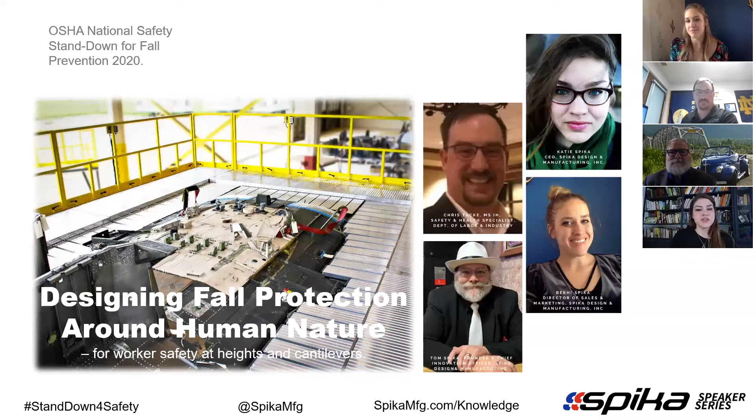But to get started, Chris, could you tell us a little about the status of the industry, some of the current challenges in fall protection and fall prevention in construction?

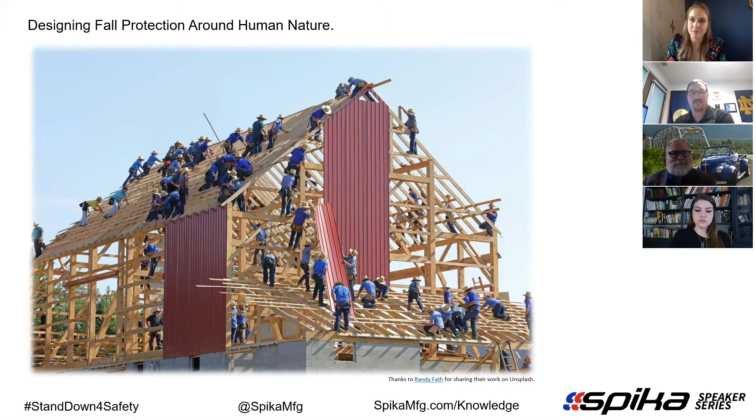If we look at the reason why we're all here today, OSHA has created these stand-down events, both in general industry and construction, to highlight certain hazards they're seeing. One of those is fall hazards in construction. Fatalities caused by falls from elevation continue to be a leading cause of death for construction workers. Fatalities from falls from elevation accounted for 338 of the 1,008 fatalities alone in 2018.

So they created these events to promote awareness of fall hazards in construction, and that continues on today. In 2019 and even into 2020, we see that fall hazards and citations relating to falls continue to be on the rise and leading towards the top.

OSHA puts out a top 10 list of violations for both general industry and construction. Of those top 10, 6 are related to fall hazards and falls in construction, with fall protection being the top violation. Scaffolding comes in at number 2, ladders at number 3, and fall protection training at number 4. So even within the top 10, the top 4 are related to fall hazards in construction. Rounding out the bottom is number 9, aerial lifts, and number 10, fall protection system criteria.

If we look at the standards OSHA is citing, 29 CFR 1926.501(b)(13) is the top cited standard. That has to do with residential construction, 6 feet or more above a lower surface — the standard says fall protection shall be in place. So that's what we're seeing out in the industry.

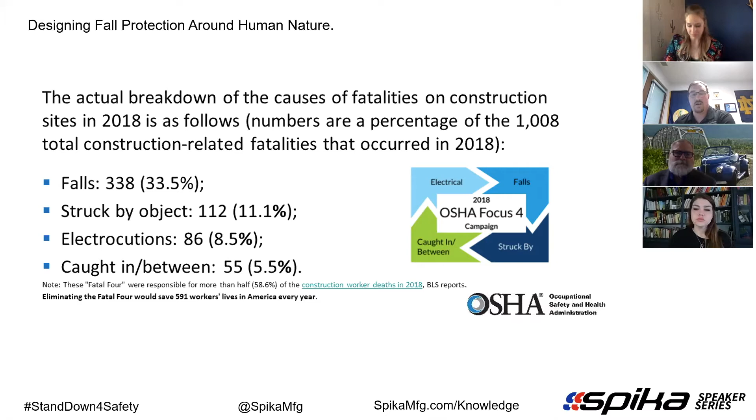And if we want to tie that into human nature, this is where I come in and the consultation project comes in. When we consult for companies, we ask them: can you tell us a little bit about your injuries and illnesses?

And a lot of times what we're seeing with fall protection is we have the equipment, but it takes too long to put on, or it's too cumbersome. It was a quick job, we were going to run up on top of the roof, so we didn't think we'd need it. And then we ended up having a fall from elevation. So that's kind of where we're at today.

Great, thank you Chris. Becky, could you chime in a little bit with some of the experiences you've encountered with our customers, some of their challenges in designing fall protection around human nature? Yeah, well what Chris said, basically if it takes too long to assemble or use, or it's too cumbersome, people just won't. So we all know human nature is kind of the path of least resistance.

What can I do that doesn't take a long time? It needs to be quick, it needs to be intuitive, which I think is a lot of what Tom is going to talk about in terms of intuitive designs. But yeah, the most common thing I hear from our customers, or people calling in that maybe are looking for a better solution to what they have, they say if it's not easy to use, they're not going to use it.

So I think Tom, you probably have some thoughts on specifically when we're doing some design work, how we can work with this natural tendency as humans to kind of take the easy road, and have ways to make the ability to have safe access at heights just be a really intuitive thing.

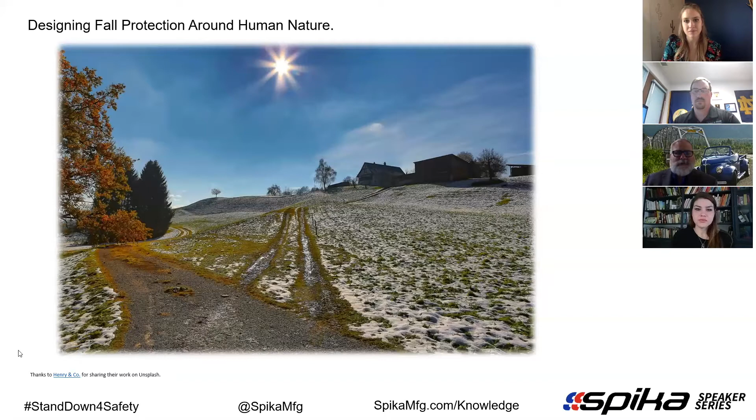They're going to see what they see to be an easier, faster, less obtrusive way, and they go that way. So that's one of the main things we have to really focus on as a designer. If we can go to the next slide there, we show one of our systems that's kind of exemplifying a number of these different things.

Now this again is showing the top of a helicopter, but it could be the top of anything you're working on. But all of this stuff, you could take a ladder, put it up to it, reach it from the side, get up on top, and just kind of make sure that you're staying in the middle. That's what a lot of people would do if they had their choice. But something like this is a fully enclosed wraparound system, and it's kind of the far end of the spectrum.

But these still move up into position so quickly and easily. It takes virtually nothing to push them up there. Once they're in place and latched into place, you have that safe working environment. You can do anything you want, and there's not that opportunity for them to not be paying attention, focused on something, and back off of the edge of their platform or trip on something and not have something to catch them with.

So what we're seeing here on the sides are what we call sliders, and they aren't on all systems, but they're on a lot of them. If you're trying to conform to an unusual shape, or you have something that's contoured, like these little obstacles sticking out here, these are common in our industry. This type of system allows you to very easily adjust from the top side to close off those gaps.

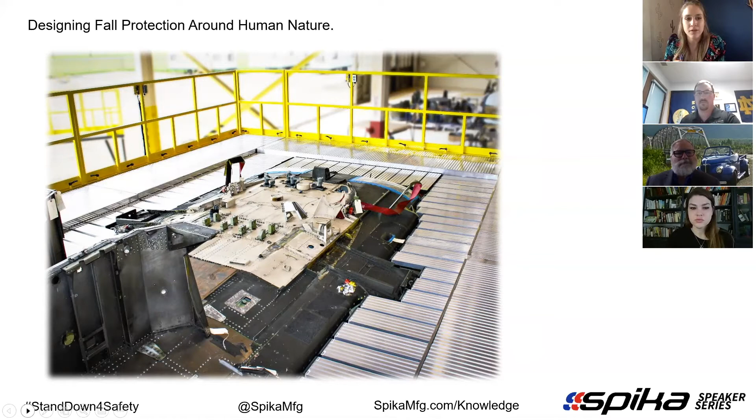It's, I think, sort of a side issue that comes with fall hazards - also some type of muscle strain, because if you have a system that isn't really working for you, you might either not use it, or not use it in the right positions. So mobility is an easy thing to consider when you're looking at having something that's easy to deploy. It has to be easy to push around.

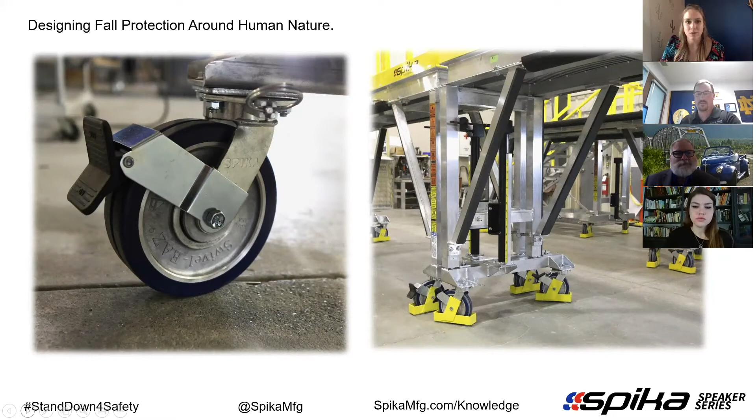The next slide will show a little bit about our guardrails. On the left side, there's basically a cam-lock attachment. When I think about deployability, I think about ease of use as well, intuitive design. So this guardrail can actually attach tool-free, but beyond that, it can also store on the railing.

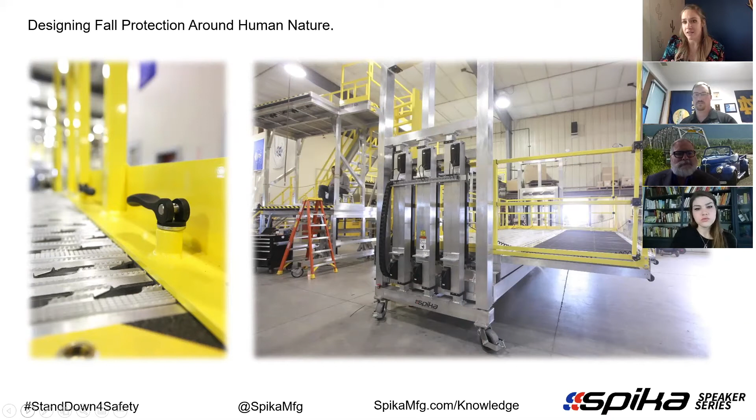So I think it's things like that in terms of deployability. It goes beyond just pushing it around. It's about ease of reconfigurability, and not having to say, now I have this guardrail, where do I put it? Or I turned this knob, now where do I put it? It's more about taking it to that final step, and thinking about making it more convenient for the person to do it correctly. Something as simple as that.

When you look at what it would take to say, geez, I really need to have this railing over here - I'm working this area that used to be blocked off and now it isn't, and I need to put a railing there - if you have to get bolts and bolt the thing down, or try to go back down, find the right rail, come up, try and work it into stake pockets or whatever, it's easy to say, I'm just not going to take time to do that. It's not worthwhile. If you have something designed that is so simple and easy to simply cam that up, remove it, set it over in place, and back down again, it's a matter of seconds.

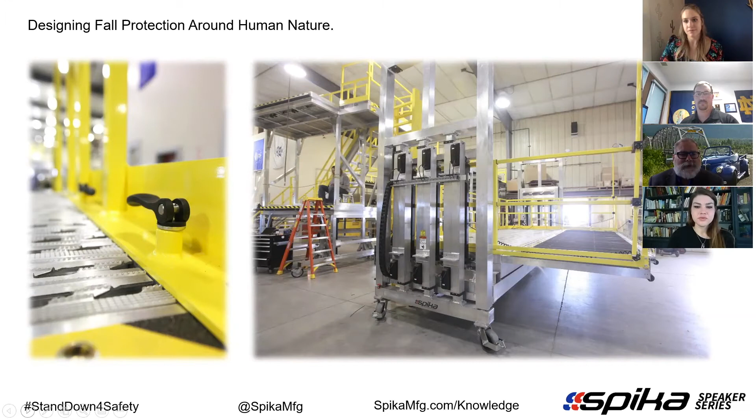So our focus is just trying to design things that are so easy and intuitive. I guess there's always going to be the human element that people have to take a certain responsibility, and you have to train them on how to do it. But if it's very intuitive, and on something like this here, where those side rails extend out...

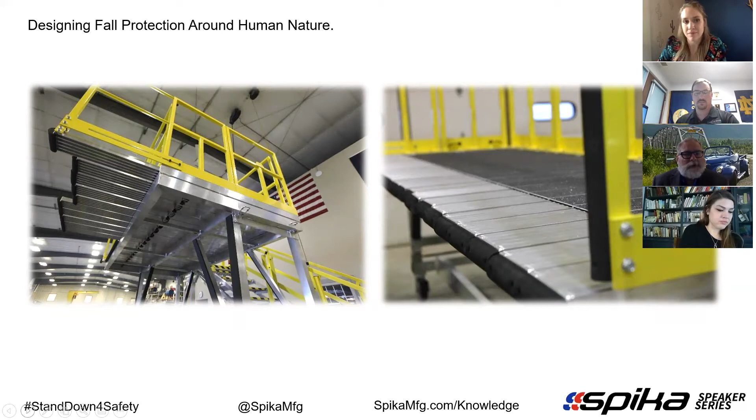...along with the slider that's coming out there, no matter where it's extended to, it's going to pull that automatically out and provide that safe working zone. And another thing, like these latches it's showing here on the left - these are another really slick system.

Instead of the old style that was done for years and years, where you'd move like a stair up to a platform to be able to access it, you'd move it up in place, and then you would have to climb up, sometimes on a ladder. Sometimes you would go up the stair itself and try and reach over and put pins in to attach them together. Too often they're not going to try and do that. They're just going to push it up and not attach it, just leave it kind of sitting there. Or they're going to be dragging a ladder up, trying to get up there to attach and pin them together. That's counterproductive to have that.

Something like this here, where you can actually just take one module and click it into the other one, and it's attached. You don't have to be up high. You don't have to have other hardware. You want to detach it, you pull on a little string, and it comes off. There's ways to design things to where you're ensuring that the user is not going to see any reason to not do it.

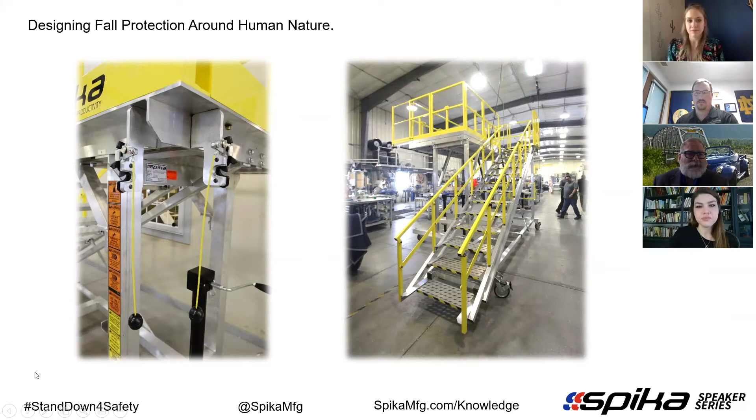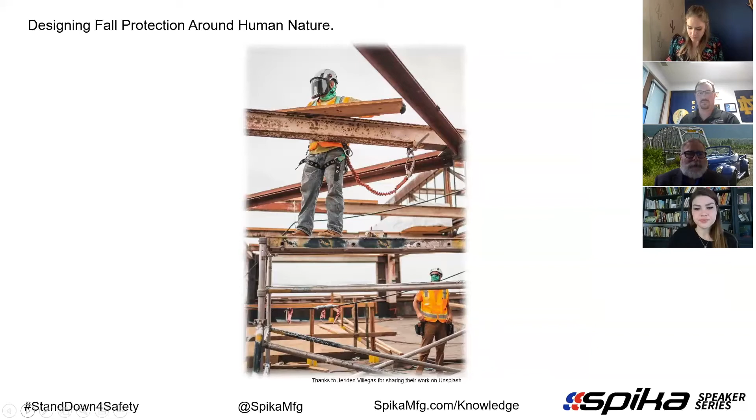So if you want to advance to the next one - this kind of, again, shows in construction there are just so many ways. Yes, it gets more difficult because you have multiple scenarios that all have a little bit different requirements, but there can be more universal stands designed that, especially if you're working inside, you can get them small enough to move into different rooms, navigate through tight spaces, and still have either manual or electric adjustability, so you can actually be working on a tall wall or on a ceiling and be able to access that.

So much easier than you could with trying to set up a scaffold, which takes time. And I'm not a big fan of just the difficult nature of using the things. To be able to push a platform in that's going to access all those areas is just really a far easier way for the users.

To be able to easily push platforms up to the sides, you have that automatic fall catch right there. Even if you step off of the top of whatever you're working on, you have the extended out range, and you have that safety railing all around. You also have a very easy way to get up top and back down again. If you're carrying parts and tools back up hour by hour, you get tired by the end of the day if you don't have a simple, easy way like a stair to get up onto it.

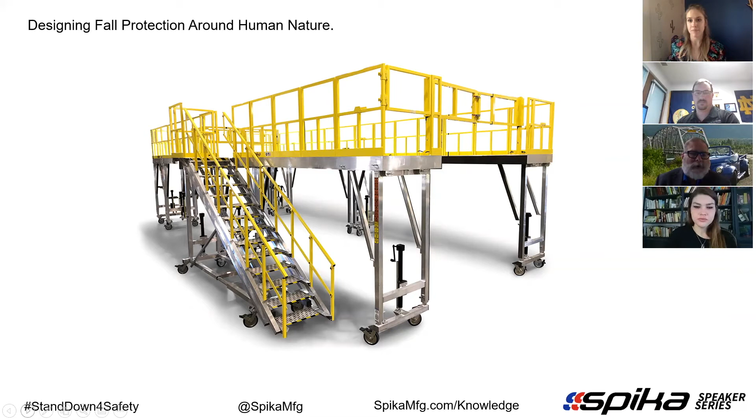So these are very universal. We do these for so many different applications, and they're very basic platforms. They're quite cost effective. Again, you can do them either fixed height, or you can have height adjustability. Manually, you can have it where you push a button and they'll go up through different height ranges. So you can actually start low and work your way up a wall or up the side of whatever you're building or working on.

It has a lot of the advantages of a scissor lift, but then advantages that scissors don't have. They're much more maneuverable, especially in tight spots or inside. You can actually work underneath them while you're working up above as well. They've got toe boards all around them, which gives it a safe work environment. Nobody's going to kick a drill off of the top or anything.

It comes down to just understanding what the need is and then truly designing something that's going to do that well. Chris, would you like to address that same concept of making sure the fall protection is easy to use correctly?

Yeah, so if we look at some of the citations OSHA gives, some are related to the fall protection system being used correctly. If we look at a safety fall protection system in terms of a lanyard and a harness, most of the time people are using the lanyards incorrectly. They're either not correctly tying off to an anchor point, or they're using the lanyard itself as an anchor point, wrapping it around a beam or a guardrail.

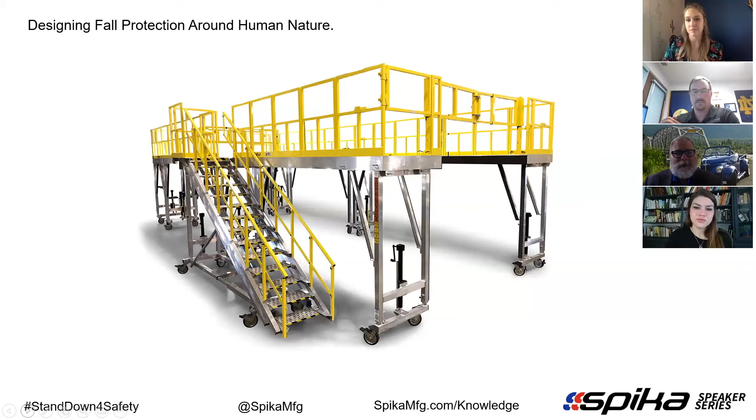But what we have seen so often is when these other solutions are being employed that really are not the best way to go, it's costing employees and employers time and money, and providing an environment that's not necessarily as safe as they think it is. So a lot of this presentation is just saying, just because this is the way you are doing it, you need to look at it and say, is this really getting us what we want? Are there better options out there?

Hopefully that encourages people to take a second look and see how well they are providing that safe environment. That ties into the third thing we've learned, which is that the fall protection needs to be the right equipment for the job. There's many different types of fall protection and fall arrest equipment.

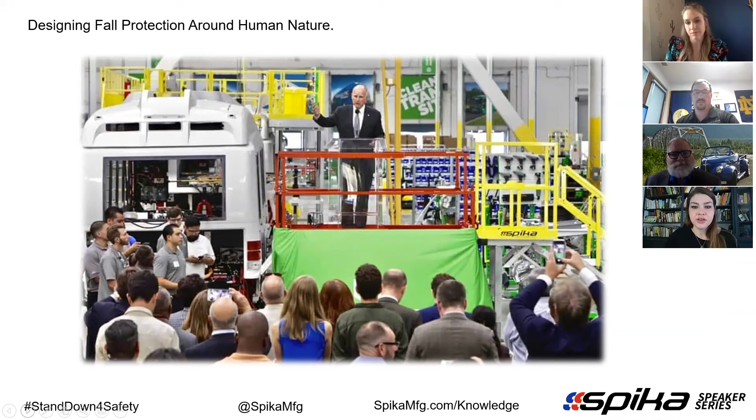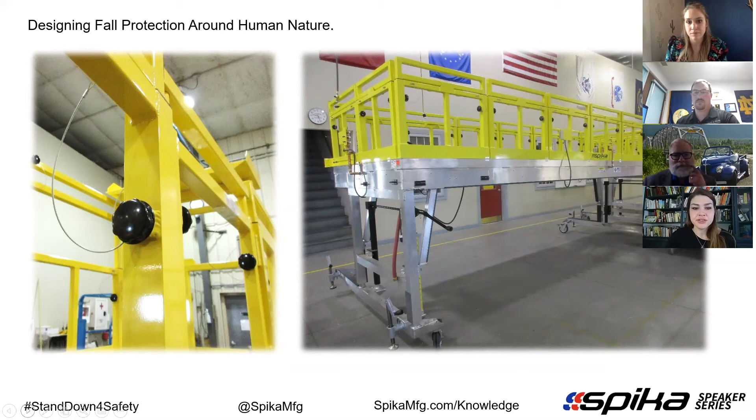There's a lot of different ways to achieve upper level access, but you've got to make sure you're providing your team the right equipment for the job so it'll be used most safely and effectively. Our next slide is going to show some examples of alternatives to ladders, because sometimes a ladder just isn't the right equipment for the job.

The ladder is obviously the first thing people think of when you're talking about getting up to something you can't reach from the floor. You grab a ladder. And yeah, there are times that makes the most sense.

But we'll all agree, if we've ever been on a ladder, you tend to reach as far as you can before you get back down and move it again. Anytime you're out of position, stretching off of that, you're getting the center of gravity off of what the ladder is designed to have. You're stretching yourself and can definitely injure yourself just from being out of position, trying to reach too far.

And that's the way so many people do it. It's natural human tendency. Yeah, you could do where you should, get down, move your ladder, get back up again.

But take something like this stand that we're showing here. If you have areas where you're constantly needing to lean over, reach over something, working on it from up above, or reaching over—like we had some applications in server farms where you had to reach clear over the top of this whole bank of servers, thousands of them, and access things back behind them. You could try and put a ladder in there, but as you're trying to lean over on that ladder, you're getting into a really unsafe condition.

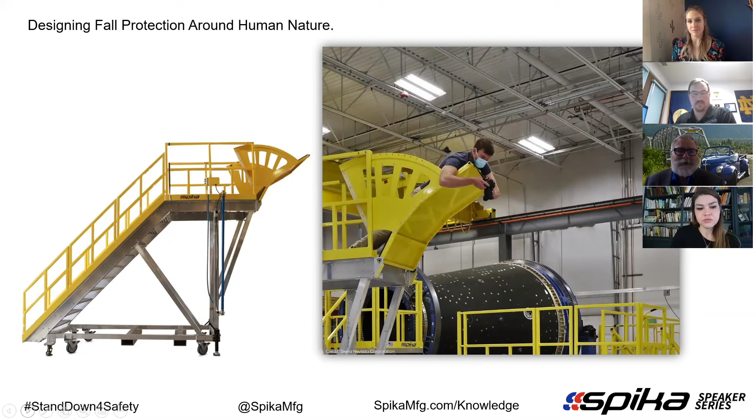Chris, what's your take on this?

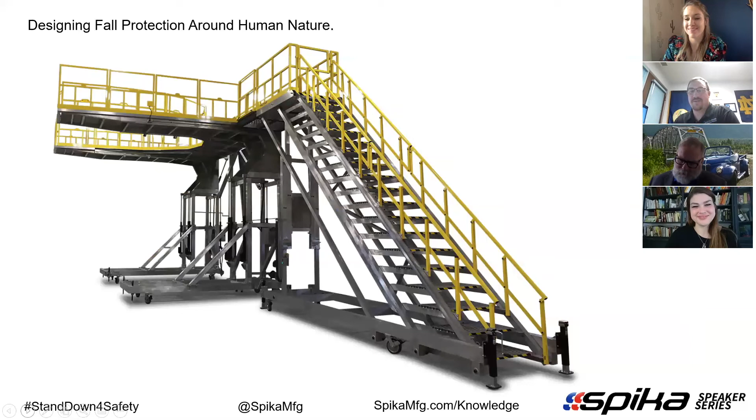Yeah, well, ladders are kind of the bane of safety people, because most of the time they're not being used properly. We're seeing step ladders used as extension ladders, or extension ladders cut into pieces and used as step ladders. So if there's a way to find a system that works better for you and achieves your goals within that job, we'd rather see that, and it can be designed safely.

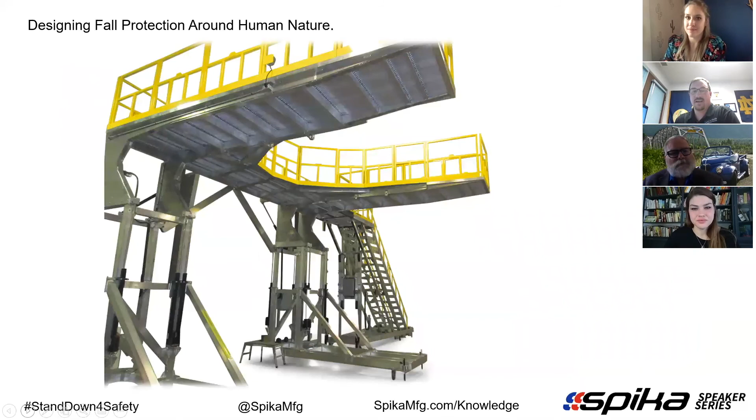Within the industry, both construction and general industry, it's going back to: are you using the right tool for the right job? More often than not the answer is no, because I have this ladder here, or I have this system here. Is it the right tool? No, but I'm going to use it anyway because it's quick or it's right here. I don't have time to go grab something else, so I'm just going to use this and make it work to the best of its ability. And that's not always the best thing to do.

And Chris, I think really what you're talking about there is the true development of a safety culture. Yeah.

Because a lot of times we as employees feel that management doesn't want us taking that extra time to do it. You're focused on being quick and efficient, but as employers and supervisors, you need to work on developing that culture that says your safety is the number one priority here. We can do this job efficiently, but we're going to do it safely as well.

You have to reach out to the people on the floor, the people out there in the field doing it, and ask: are there things you just really don't feel safe doing the way we're doing it? Are there times you've had close calls and realized it could have gone worse, that you could have taken a tumble that would have been really bad?

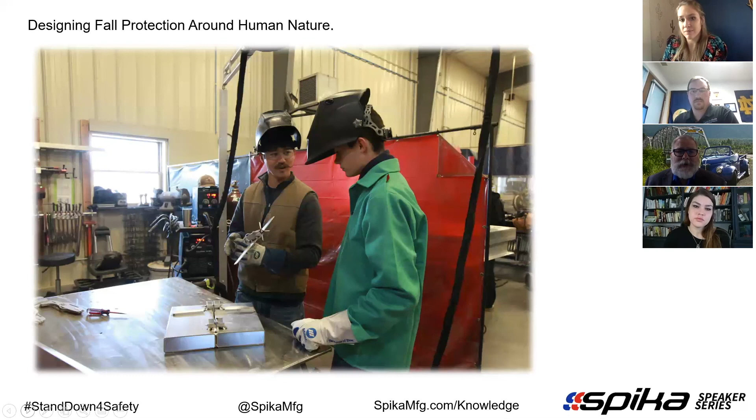Things happen so quickly, and sometimes you have people on the floor who will say, 'Man, I had a close call there one time, that could have been a lot worse.' You need to hear from them and pay attention to that, and say, 'Okay, how can we do this safer?' Encourage that feedback from them. Once you get that culture of safety, people start thinking in those terms.

They want to go back home to their families at night. You don't want to be paying somebody to be on bed rest for a month because they can't come to work and produce. That costs an employer money and screws up your schedule. Nobody wants these injuries, but so many times we don't really take it seriously until we have an injury, and then we start looking at it.

So it's really important to develop that culture and engage the people out there working, to get their ideas and help them understand that you're supporting a safe environment. You want them to take the time to do it right, and give them the right tools to do it. Chris, what's your advice on that?

Tom, I think you hit it on the head. There needs to be collaboration between the employer and the employees, bringing the line-level and middle manager staff in and saying, 'Hey, what issues are you seeing? What questions do you have? How can we better serve our customers and our stakeholders, but also serve the employees?'

When you come up with that list of things that need to be completed, questions, concerns, or action items, make sure companies are writing those down and following up on them, then showing their employees: 'Here are the concerns you brought to us, here's what we did to address those concerns, and what we're going to do going forward to make sure those concerns don't come up again.'

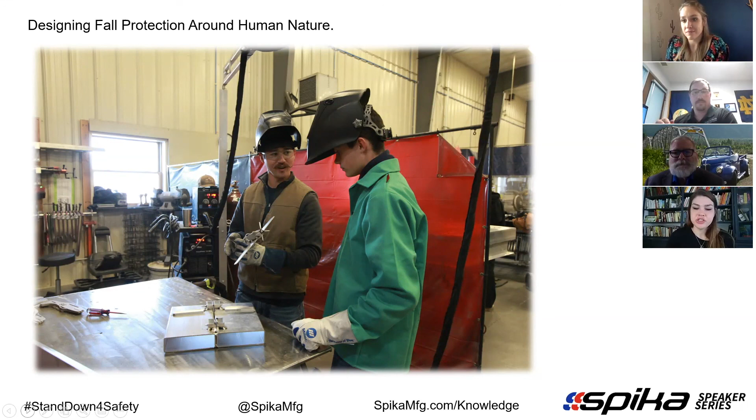That culture really has to come from a trust that the leadership is going to take safety seriously and act on it. The best way is to just follow through on the concerns.